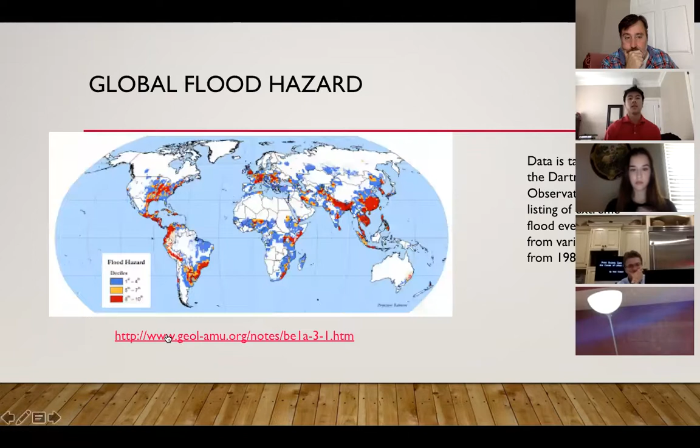As you can see here, flooding affects many across the entire globe. The impact of flooding is clearly widespread, revealing where flooding is significant. But this map only demonstrates where flooding has an impact.

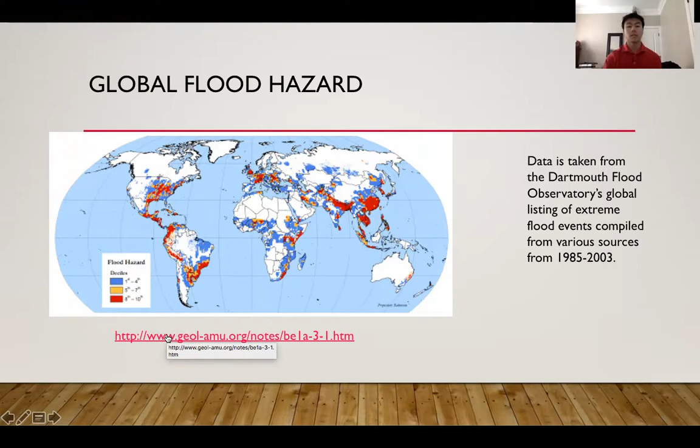We've seen how impactful flooding can be across the globe, but how does flooding affect us locally here in the US? This picture provides a general understanding of the flood risk in the US. With this, we know where in the US flooding has an impact, but just how destructive can flooding in the US be?

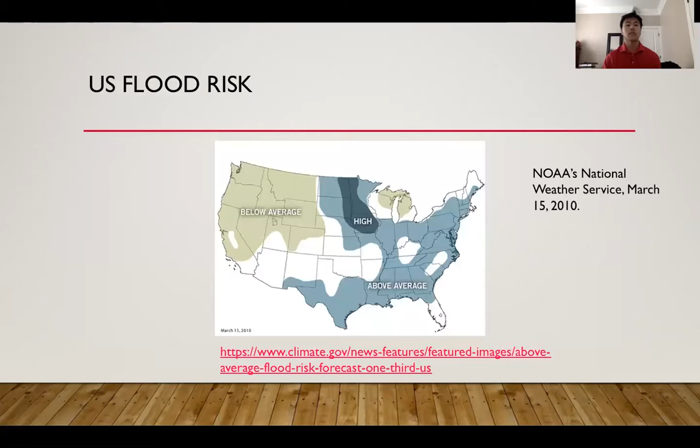I'm sure we're all familiar with the recent incident of Hurricane Harvey, a destructive Category 4 hurricane that hit Houston, Texas in 2017. This disaster cost $125 billion in damage and was responsible for 103 deaths. These numbers reveal just how destructive flooding can be in an urbanized area like Houston. So why do urban areas get hit harder by flooding compared to non-urban areas? Well, let me give you a visual demonstration.

Here I have two tubs. One is empty and one has some dirt. I will then put the same amount of water into each tub. This is about half a cup of water.

Notice how there's not much running water in this tub, but the water is very runny in this tub. This tub represents a non-urban area, and this tub represents an urban area. You see how this can be a problem for urban areas. So the question arises, how can we prevent urban flooding? What can we as a people do to prevent urban flooding?

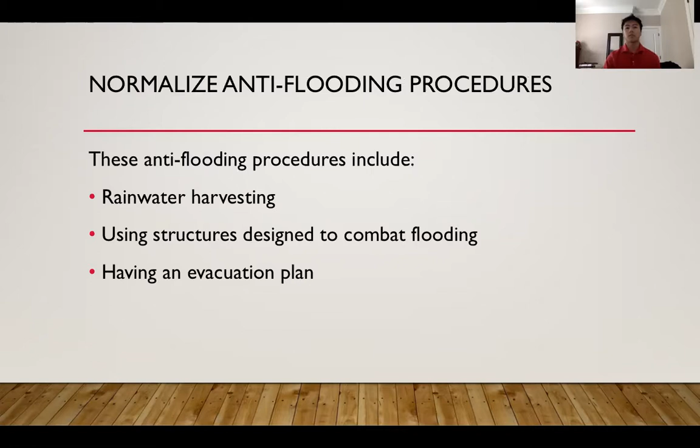Rainwater harvesting is exactly what it sounds like. You simply collect rainwater. It is a form of mitigation as it takes one of the causes of flooding and reduces it. The main objective of rainwater harvesting is to reduce the amount of water running across impermeable surfaces.

A study at Penn State tested the effectiveness of rainwater harvesting. The results indicated that the method could decrease stormwater quantity peak runoff by 52.7% and total volume runoff by 46.1%. This means less chance for flooding, less water pollution, and more water conservation.

The results also indicated that Penn State could save between $10 million to $30 million over the next 30 years by investing in rainwater harvesting. To sum it up, rainwater harvesting keeps water off the roads and inside personal water storages.

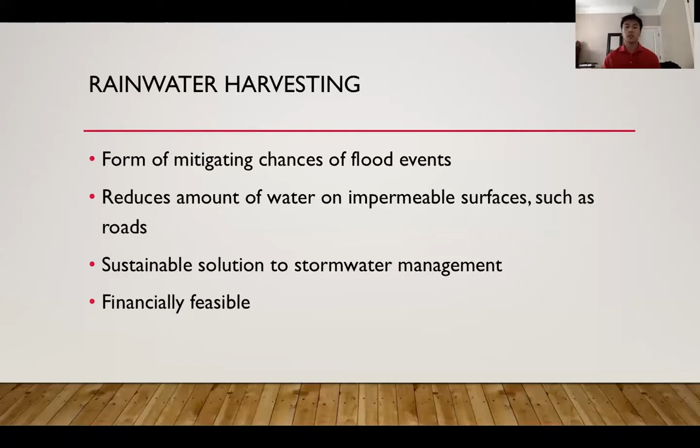Here's a picture of a very simple rainwater collector. This is actually a picture of my rainwater collector in my backyard. The gutter on the roof simply collects rainwater and then transports it to a nearby storage. This cheap, standard water collector does its fair job in managing stormwater while also collecting water for irrigation purposes.

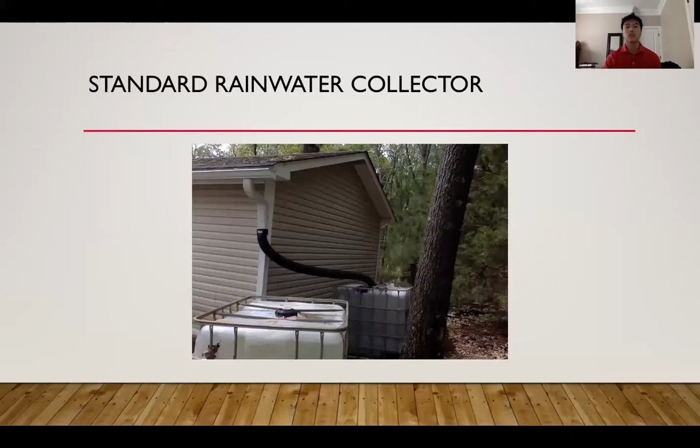Now, the next procedure is implementing anti-flooding structures, specifically for housing. This is a form of adaptation as a process of making change to protect ourselves from flooding. The main objective of anti-flood structures is to reduce the damage done to housing from floods.

Taking personal measures to self-protect is a great step to take in minimizing the destruction of flooding, as it means less reliance on the government, because the government cannot immediately help every citizen. The decision to independently protect your own household is also economically reasonable, especially in areas prone to flooding.

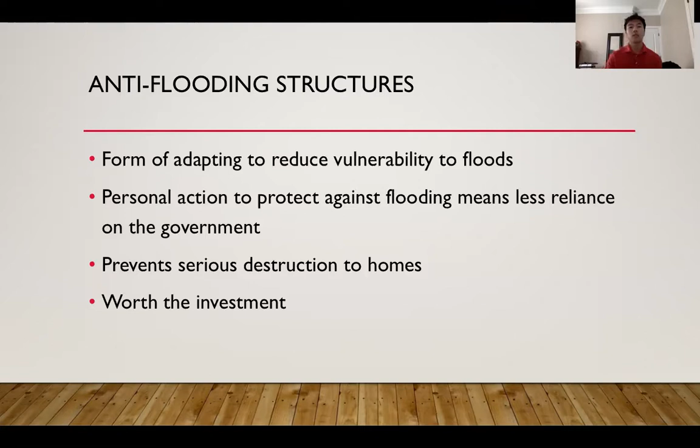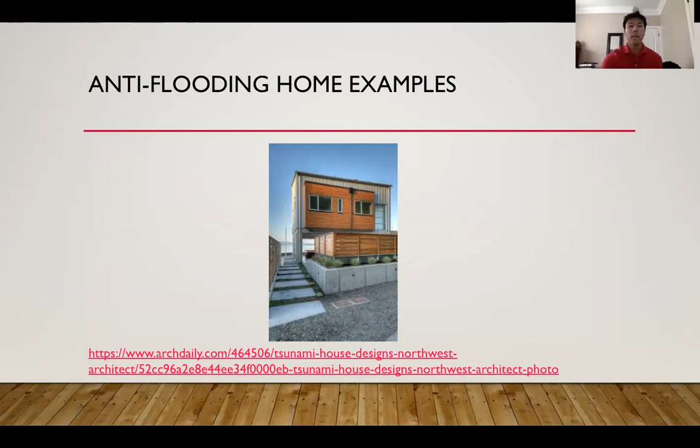This type of method to protect against flooding is much less extreme. This type of structure is most effective in areas with mild flooding.

Our third and last anti-flood procedure consists of having an evacuation plan. This is a form of preparedness, as it establishes a sense of order to help citizens respond to emergencies as correctly as possible. The main objective of an evacuation plan is to make clear to citizens how they should respond to a flood event. It is nearly impossible to reduce the chances of flooding to zero, so knowing how to respond to such an emergency is important.

When undergoing a disaster, it is easy for citizens to panic and make the situation even more problematic. Following an evacuation plan will ultimately reduce the panic and minimize the struggles a flood event may cause.

Here on the left is what an emergency plan may look like. It is simply a set of guidelines for citizens to follow in an orderly fashion that will help smooth out response to a flood. On the right is what an evacuation plan with routes and exits may look like in its simplest form. I actually just went to MS Paint and drew an ideal exit route in the situation in the picture. A river is on the left, so you want to go away from that, preferably to higher ground.

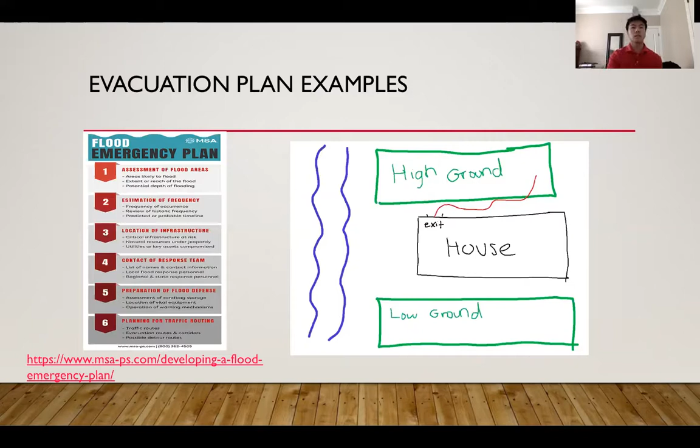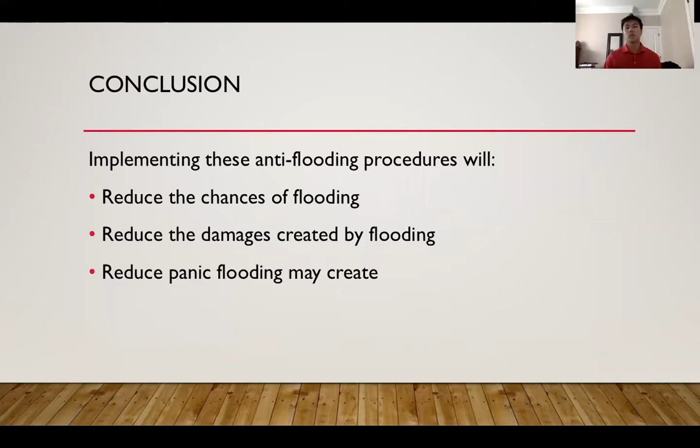In conclusion, the answer to the problem of urban flooding is the implementation of anti-flooding procedures. Citizens becoming accustomed to these procedures will effectively prevent flooding as much as possible, especially those who live in urban areas of which risk of flooding is high. To sum up, normalizing these anti-flooding procedures will reduce the chances of flooding, the damage caused by flooding, and the panic caused by flooding. Thank you, and that'll be all from me.

Way to go, man. Great job. I'm going to stop the recording. So I'm recording and Hope, it is your show. Okay. So whenever you're ready on your first word, I'll begin recording. All right. Take a deep breath. You got this. You're going to do great. Okay.

Hello and good morning. My name is Hope Mercier, and I'm going to be speaking to you about how urbanization has caused an increase in flooding and what we can do to solve this issue.

Research has shown us that each year, 36 million trees are cut down in urban areas and are instead replaced with 167,000 acres of impermeable materials such as asphalt and concrete in just the United States alone. You may be thinking to yourself, what does this have to do with flooding? Well, it turns out it has everything to do with it.

The roots of trees create small passages in soil called macropores that make it more absorbent by 153% compared to soil without plants, and therefore it is better equipped to fight against flooding. The trees also prevent sediment runoff and cause any water that lands on their leaves to evaporate quickly.

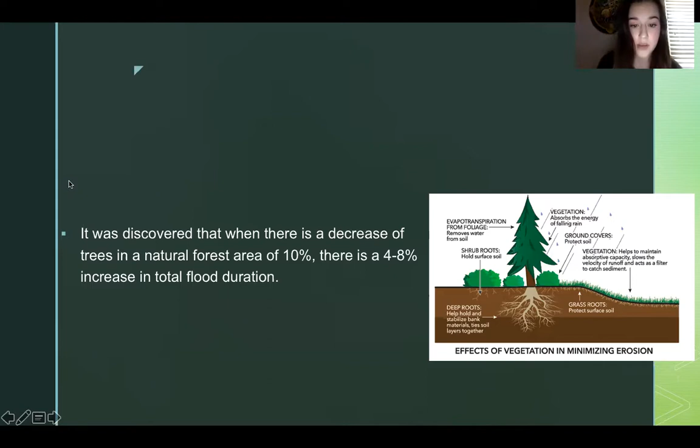To further confirm this theory, a study was done by Global Change Biology, and it was discovered that when there is a decrease of trees in a natural forest area of 10%, there's a 4 to 8% increase in total flood duration. A great example of how urbanization has made floods cause more damage is the floods in Taiwan.

There's often an onslaught of storms and typhoons in the summer and autumn of Taiwan. As the years go on, they continue to cause more and more damage. And according to a study done in 2006, rapid urbanization without proper land use management is the cause of why they continue to worsen.

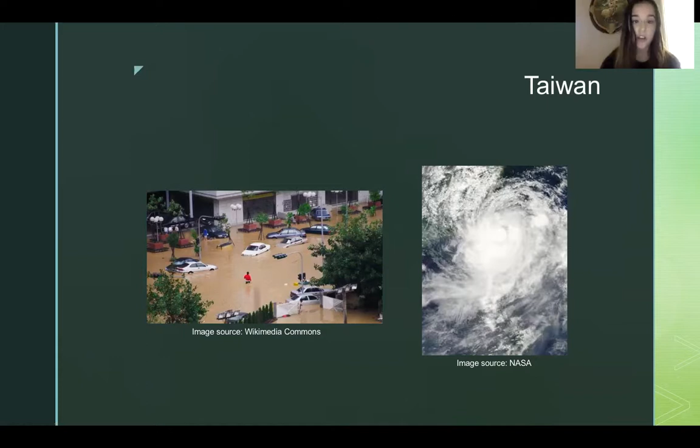This same reason was also what scientists believe caused Hurricane Harvey in Houston, Texas to be so violent. It was discovered that urbanization had made the flood 21 times more likely to occur, meaning that the increased risk was 2,000%. Hurricane Harvey ended up being the second costliest tropical storm ever, causing $125 billion in damages.

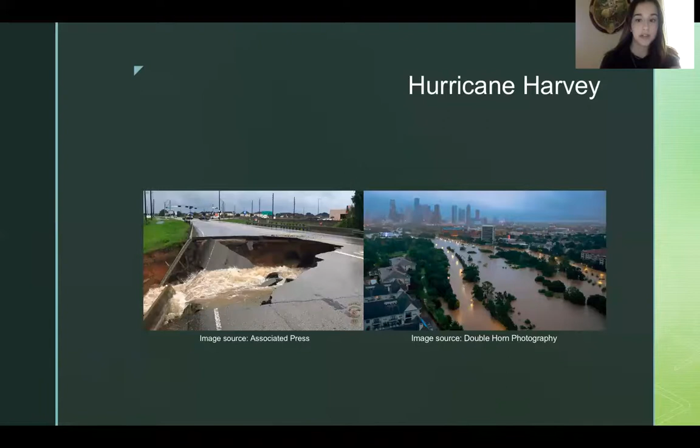To give some perspective on how expensive this is, with this same amount of money, you could have launched 1,923 Falcon 9 rockets or bought 6,578 of the world's most expensive car. This goes to show how much damage deforestation can do.

However, since there is no stopping urbanization since the population is constantly growing, there is also no stopping deforestation, so it is better to adapt. My solution to this issue is culverts.

Culverts, when used properly, reduce flooding on properties by moving large volumes of water through the system while also preventing the backup of floodwater onto adjacent properties, according to nrcsolutions.org. They also slow water down to reduce the chances of it eroding the roads and causing even more damage.

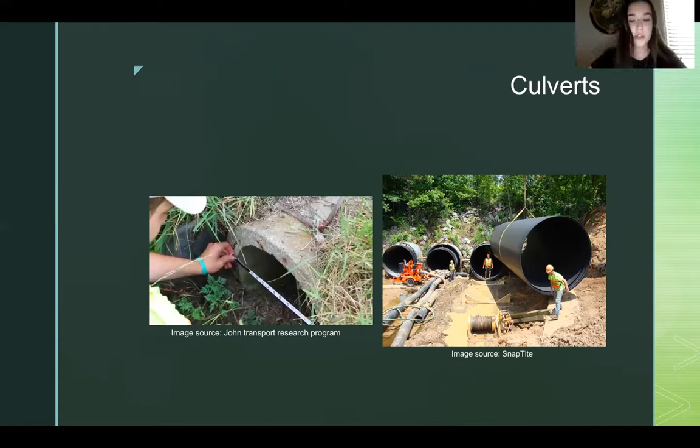According to a study done by California State Parks in December of 2001, culverts will increase discharge capacity, provide continuity for bed load and suspended load transport, eliminate crossing or road embankment filling, prevent diversion of stream flow onto adjacent road surfaces, and reduce the risk of plugging from large woody debris or sediment plugs.

In addition to this, they have the ability to protect roads from ephemeral streams during heavy rainstorms by preventing water from creating an impoundment without the costliness of building a bridge. This just goes to show how culverts, along with many other forms of flood protection, could completely protect a large city from flooding. An example of a culvert being used to protect a city is in Los Angeles, California.

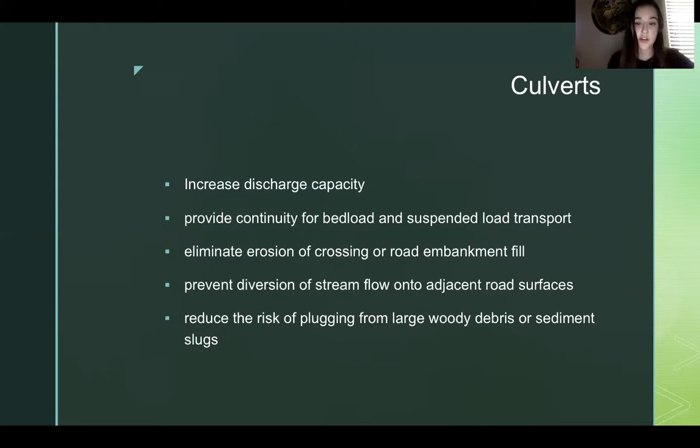In 1938, there was an extremely damaging flood caused by a storm that overfilled the Los Angeles River, and it ended up destroying hundreds of homes and businesses. The LA area decided after that they were going to convert the Los Angeles River into a concrete basin with culverts leading water down from the San Gabriel Mountains and into the Pacific Ocean.

This was proven to be an amazing choice since in 2008, they had a flood with even more power and even more water than the previous one in 1938. But it did not cause nearly as much damage since the culverts were able to control the water better.

So the question was, how can we prevent flooding in urban areas? Well, conclusively, the diversity and ability of culverts make them the ideal form of flood protection for urban areas, where there isn't the same amount of room or budget for larger scale flood protection as there is in rural areas. If used properly, culverts could save lives, homes, businesses, and the economy of cities from the harshness of floods.

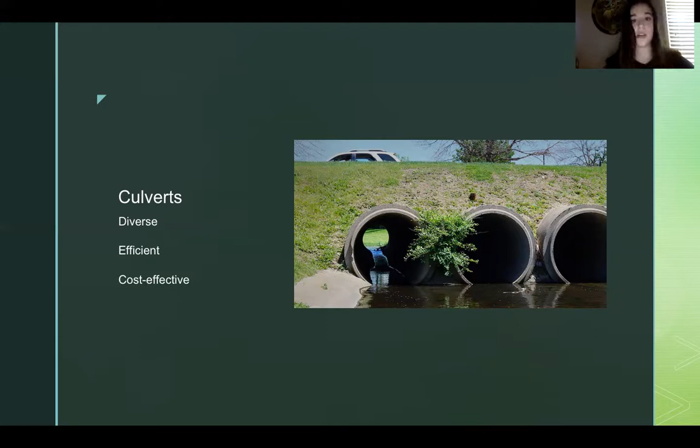Woohoo! Way to go, Hope. Let me stop the recording for a moment. Hannah, the floor is yours. Whenever you are prepared, I will begin recording on your first word of your presentation. Can you see the PowerPoint? Yes, when you're not standing in front of the camera, I can definitely see it. Okay. You had your image and the TV perfectly centered in that last shot. Okay. Does this look okay? That looks professional and perfect. Okay. Oh wait. Is it beginning? Oh, yes, sorry. You're good. Go ahead whenever you're ready.

Good morning. My name is Hannah Jeffcoat, and today I am here to discuss flooding. Flooding all over the world has ravaged homes, cities, and parks, but especially devastates urban areas. These areas are so vulnerable to flooding because of their impermeable building structures and tight streets that act as coursing rivers during floods.

Because more roads are closed during flooding and driving speeds are lowered due to slicker roads, urban areas experience congestion when there's heavy rainfall. Research from a group of civil engineering scholars states the reduction in performance of transport systems due to flooding is the most detrimental factor for the society, and it has been estimated around 100,000 pounds per hour for each main road affected. This is just over $124,000 US.

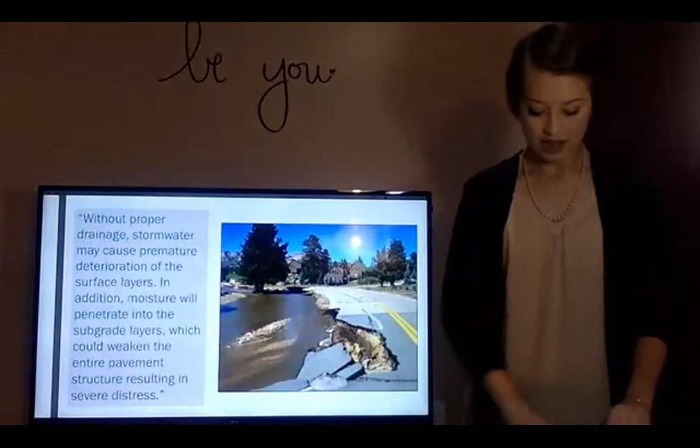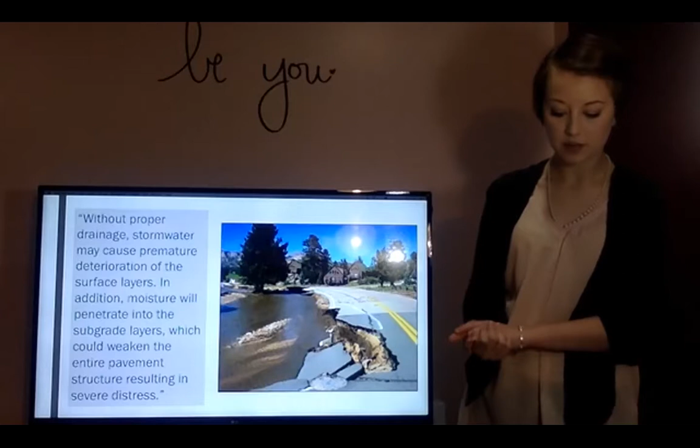The Illinois Asphalt Pavement Association said, in relation to regular asphalt construction, without proper drainage, stormwater may cause premature deterioration of surface layers. In addition, moisture will penetrate into the subgrade layers, which could weaken the entire pavement structure, resulting in severe distress. This proves that asphalt is not made to tolerate water, and other drainage systems are required.

From the pictures I showed you a moment ago, you can see roads act as coursing rivers during floods. Too much flooding can make these asphalt roads dangerous. When the water won't soak through, it gushes along the surface, carrying debris along with it and running into buildings, cars, homes, streets, and anything in its way.

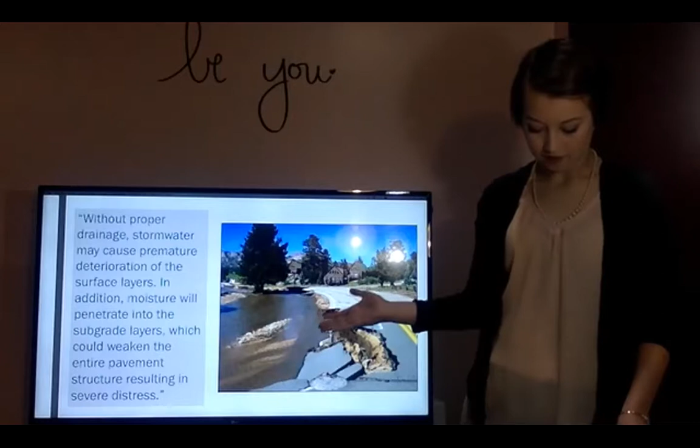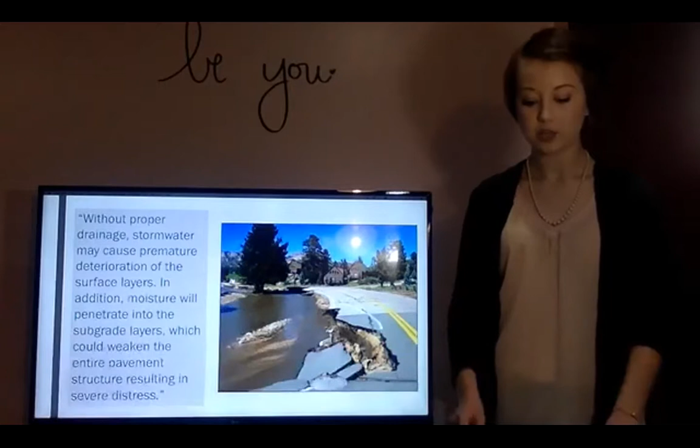This picture shows us a grim view of what roads can look like after flooding. The floodwaters put intense pressure on the asphalt, making it unsafe after floods. They oftentimes crack or lead to bridge damage. The floods themselves are dangerous, but so are the non-porous asphalt roads even after the flooding is over.

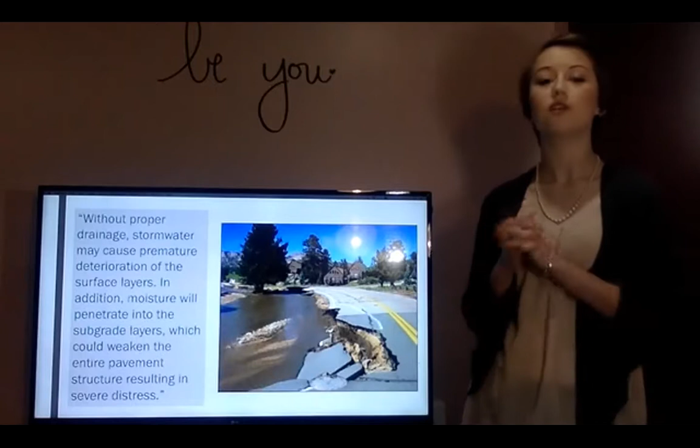What I'm about to show you is the most affordable, efficient drainage system in the entire world. That's right, dirt. That is the environment's natural water drainage system. Unfortunately, it is unrealistic to revert back to dirt roads in these urban areas, but we can pick the second best solution. Porous asphalt. This block is also asphalt, but it's porous. As you can see, the water filters right through this pavement.

A permeable pavement called Topmix Permeable can absorb 4,000 liters of water per square meter in just a minute. That is 500 times more than the bottle I just poured on this asphalt. Using the Earth's natural water drainage ability by opening up our roads can lessen or even eliminate flooding in urban areas.

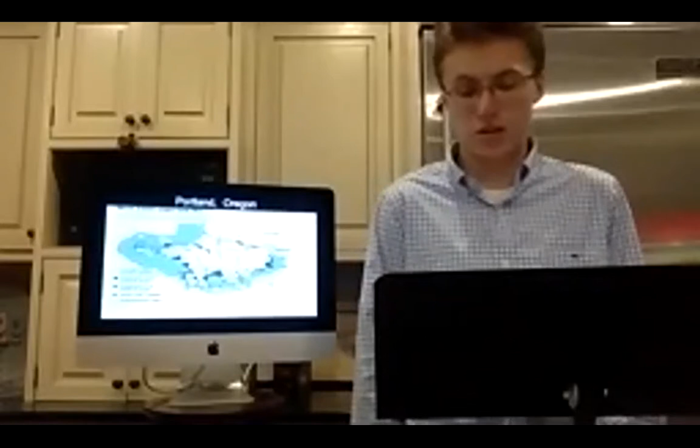A way to protect communities from flooding is by providing natural downstream storage for rain and snowmelt. Milwaukee, Wisconsin is a metro area of 1.5 million people. As the area grows, more rain and snowmelt are expected to flow downstream, causing flooding. During extensive flooding in March of 2019, 281 million gallons of sewage water overflowed. The untreated waste and storm water poured into local rivers because the frozen ground could not absorb the rapidly melting snow.

The Conservation Fund and the Milwaukee Metropolitan Sewerage District launched a flood management program called Green Seams. Their goal is to protect open spaces in the metropolitan area. They purchased land where major suburban growth is expected to occur in order to protect the land.

Smart growth policies need to be developed. Cities need to develop smart growth and long-term approaches into their development plans in order to withstand and recover quickly from urban flooding. Due to major damage caused by Tropical Storm Irene in 2011, the U.S. Environmental Protection Agency and the Federal Emergency Management Agency assisted Vermont with incorporating smart growth and long-term approaches into their development plans in order to increase their flood resilience in the future.